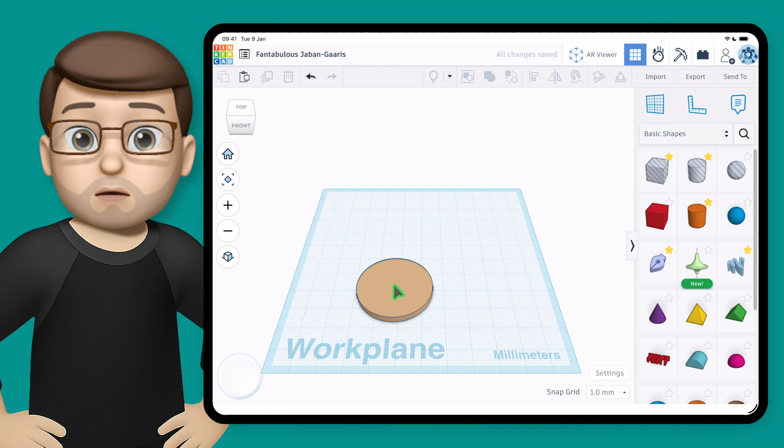So if I tap onto my existing shape, at the top here on the toolbar I can either copy and paste, or I can press duplicate and make a new copy straight away. At this point I'll just quickly resize it and position it where I want it to go. I went over this in my first Tinkercad video, so do check that out if you're not sure how this is all working. But you can see that I'm starting to build up the shape of a column here.

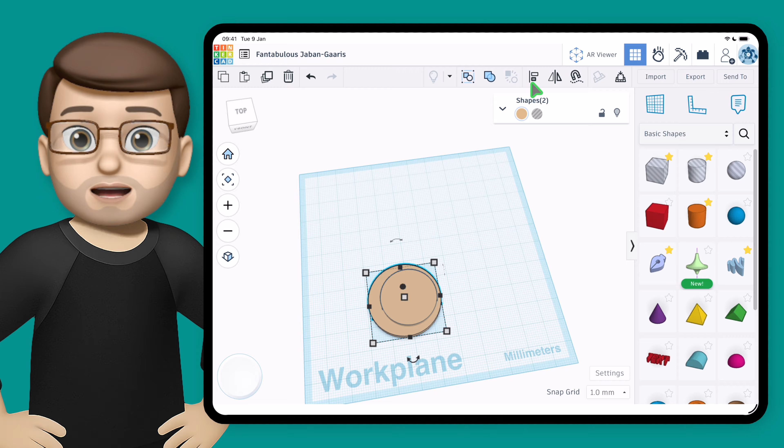As I make this, I'm going to use the alignment feature on the top toolbar, which lets you align the different objects to different axes. I'm going to align mine to the center of the X and the Y axes, which means that the disks will be stacked perfectly in my column. The final thing to do is to add the column post itself. I'll get one more cylinder here and stretch it out.

And I want to align 3 objects together now. All I need to do is tap onto each of them in order, and it will automatically highlight multiple objects for me. So now I can press the alignment button, and I can align it just like before with all 3 objects. And actually, while they're all selected, it makes sense to group them together at this stage as well, and I can do that using the button here.

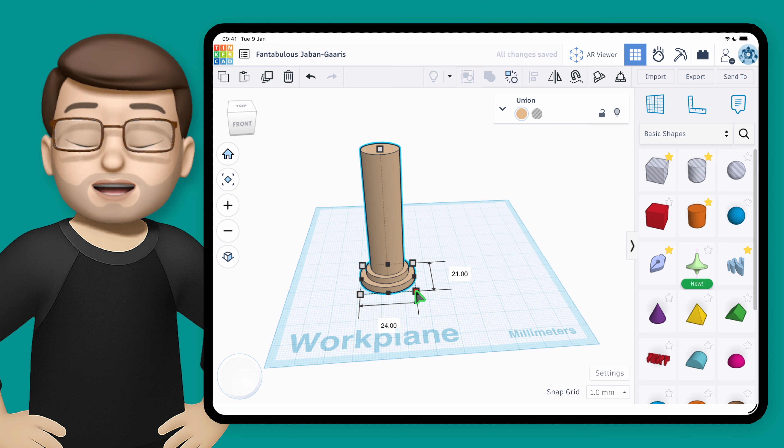Once it's grouped, you can then move, resize, and scale that particular object because it's now one item. I can ungroup it later if I need to, but for now having it as one unit is perfect. Let's position it off to the side of my work plane, and then we're going to press duplicate at the top to make a second column. Right now it's placed that column in the exact same space as my first one, so I need to move it sideways by just dragging and dropping it like this.

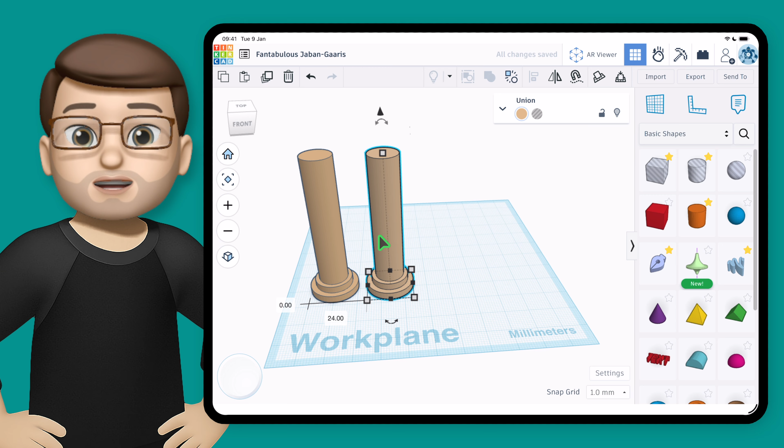Now I've done that, I've got 2 columns, and I can show you one of my favourite features in Tinkercad. It's really quite clever. If I then duplicate my column again, it's automatically predicted where I want it to go. It's looked at my previous 2, and it's realised I probably want the next one in an order. If I don't, I can of course move it, but now I can just press duplicate again, and again, and again, and it's positioned those columns perfectly for me.

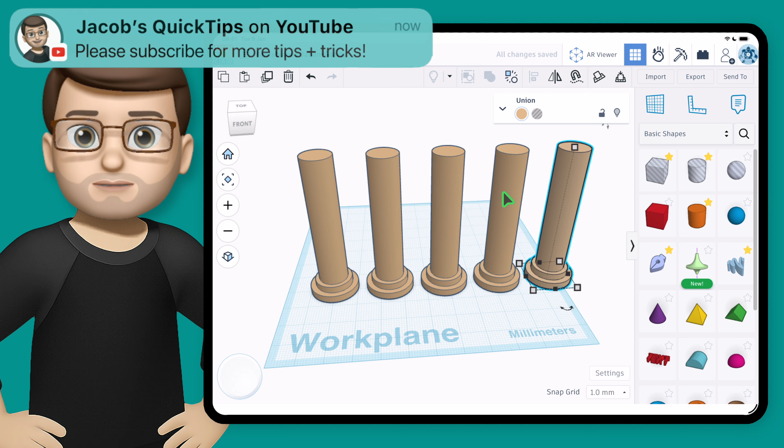And then if I want to move all 5 columns in one go, I can simply tap and select them in sequence, and now when all 5 are selected, I can just drag and drop them. Of course I could group them together again if I wanted to. I could duplicate them here and have 10 columns, whatever I like. The final thing to do for me is to put a block on the top of this, and then to stretch it across all of my columns. Then I've got the basis of my building, which is going to be really exciting.

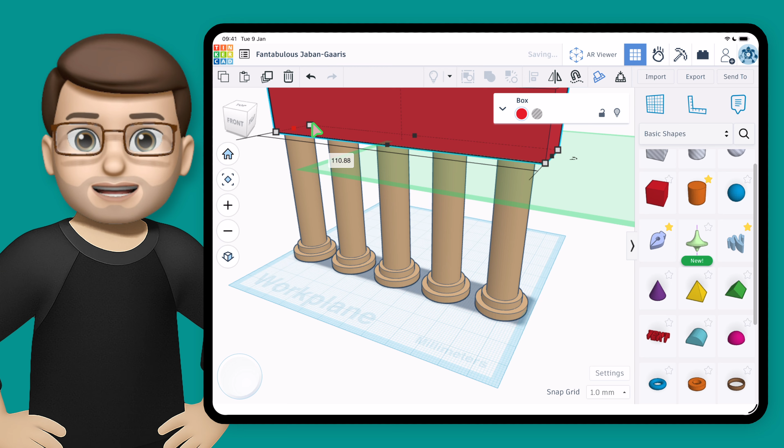And so that's a quick guide to grouping and duplicating objects in Tinkercad.